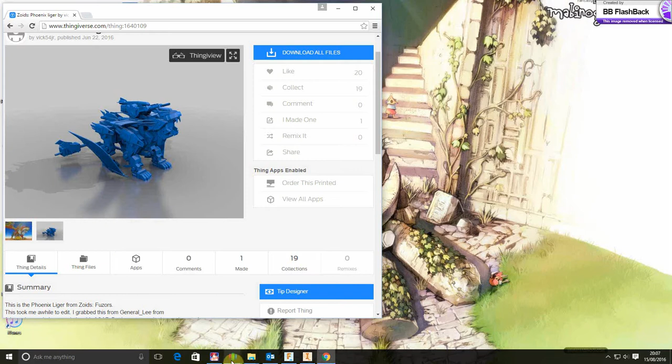It is this one, I believe. Let me just see, that looks about right. Let me just double check, make sure. Yeah, that's the one. So this is the file I downloaded, and found that this is how it comes. So I'm just going to close that, minimize it, and go open another one.

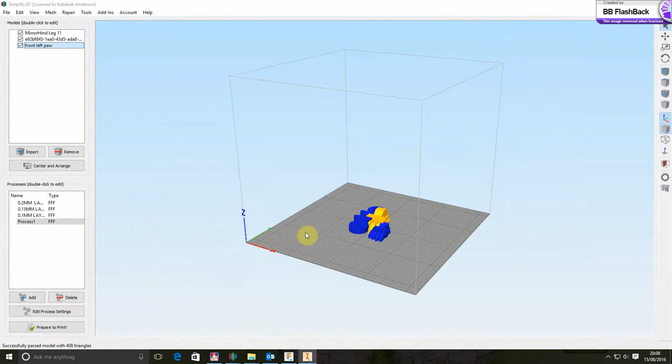I've got about 1, 2, 3, I think 4 versions open. So you can have quite a few open, and there's a reason why, and it will become apparent. Right, import, downloads. Is it? I think it's this one.

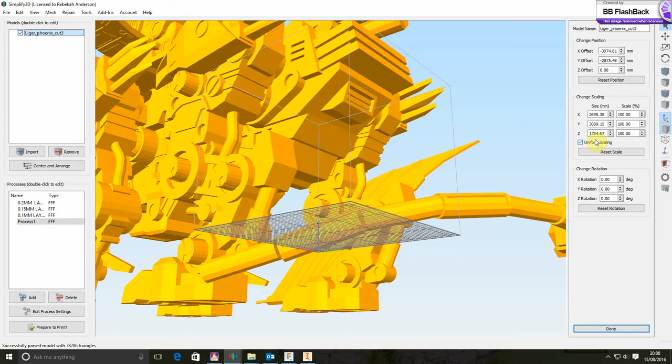Yes, I don't know how this guy designed it, but look at it, it is absolutely huge. 2 meters by 3 meters and 1.7 meters high. You know, sometimes you design stuff and it just gets away from you. So as you can see, it is that package. I'm just going to reduce it to 8%. Boom, Center and Arrange, there we go. And let's zoom in to that a bit.

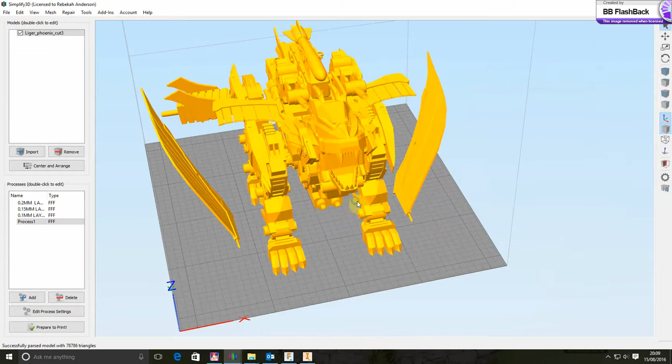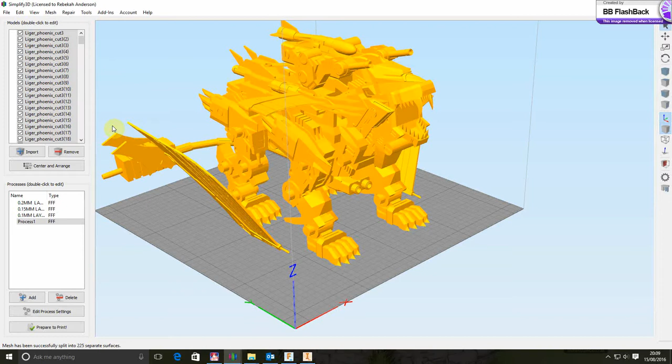Right, so it's one pack. I'll tell you what, if you print this in one go like this, you're a braver person than I am, because not a chance, there'll be just too much cleaning. So I realised that we got that Separate Connected Surfaces. I thought, how does it work? And I think quite a few who'd watch this video would ask the same question. Well, let's press that and wait, and wait, and you can see here it really cut it up big time. I think about 225 parts or something.

It doesn't take this apart, which is a good thing, and I'll explain later. However, if I do a Center and Arrange, you can see all the parts are laid out. So where someone has uploaded one piece, a complete model, you could actually take it apart. It doesn't work for everything, but it's worth a try.

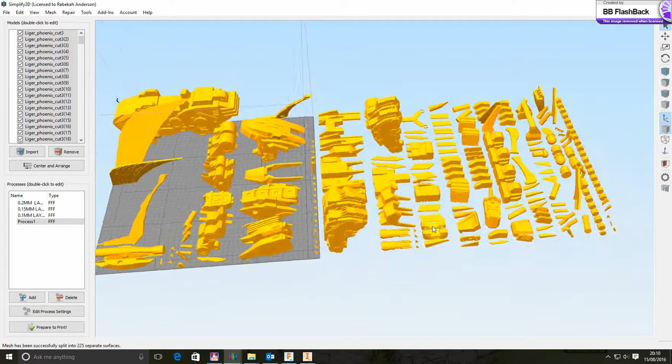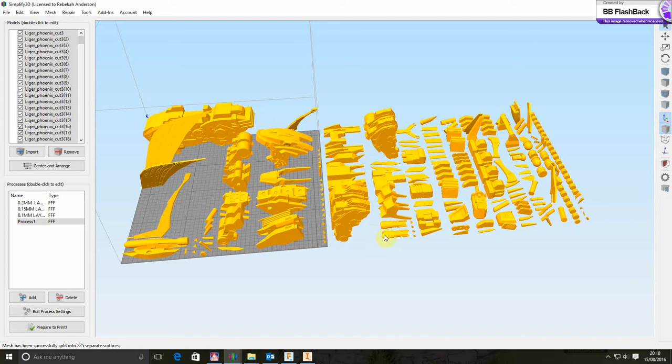Now what you've got to also realise is these things are the teeth, these are the shock absorbers, pistons, whatever for the legs. It really does take it apart, and there's stuff here you do not want to print separately. There's no point. You leave these little knobbly bits that go on. You know, it really does. So that's why I say don't rearrange after you've done that.

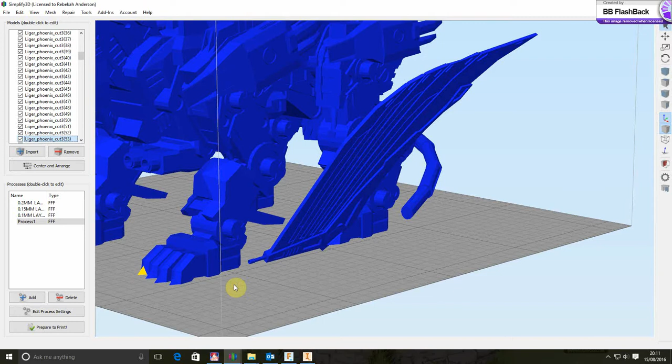Now let's find something that's a bit obvious. There we go. Right, is there any point in having that piece separately printed? No. So what I did was click on features that I think are part of the same printable item. So shift, press and hold shift, click, click, click, click. You can see how this guy's built it. It really is in separate bits, but there we go, one part.

One thing you'll notice in this instance, if I just get rid of that, you can see it's a block, right? So it's a part within a part. There's no cavity in this, it is really overlapping solids. Now there is a way around that, and I'll show you that later. That's why you see Fusion 360 open here, so you can really mess around with it.

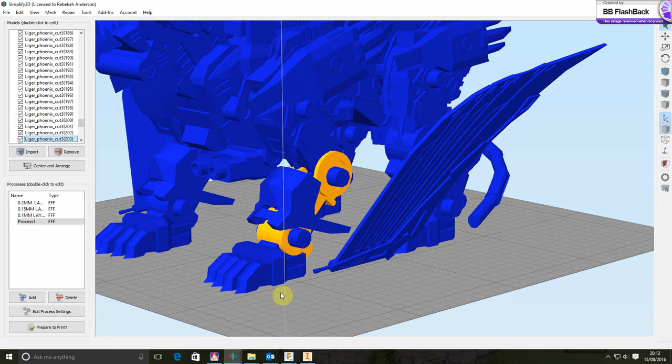However, in this instance, how to deal with this sort of thing, having multiple parts, well too many parts. So shift, hold, and click, click, click, click, click. Right, that's one part. If I go to File, Export Model, Export Binary STL, right, press that. I'm just going to save it in my downloads there, and I'm going to open another iteration. Let's hope it doesn't crash.

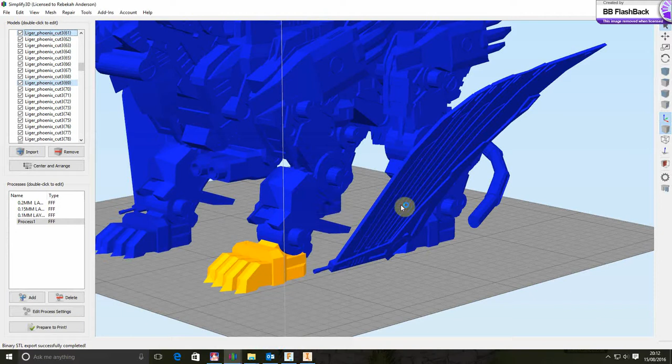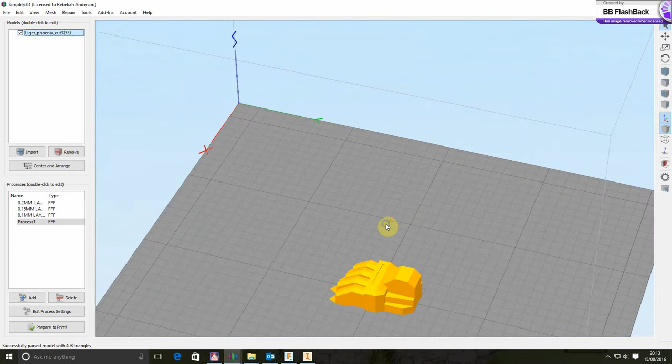Alright, there we go, remove all this guff. Right, import in my downloads. Where is it? Liger. Oop, make sure I've got that one, that one there, I think it is. Open. Boom, right, so only when you do the export, only the highlighted parts. So lo and behold, you have a single part. If you double click on it, it's 100%, so now it classes that as 100%.

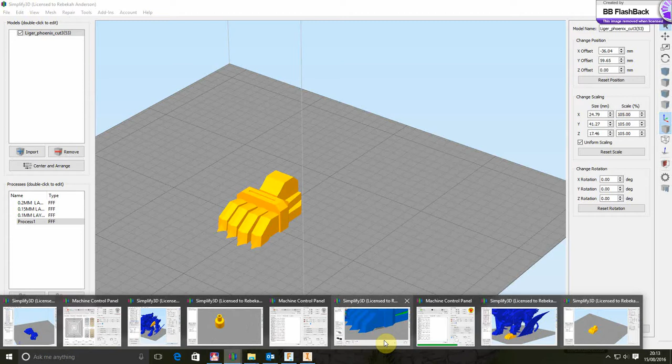So if you want it bigger, increase the size. If you want it smaller, decrease the size, whatever takes your fancy, and you can print that. Now, this is why I have more than one open, because I can then look at, say, that looks like a separate piece, but I might print it at the same time as this. So what I'm going to do is take that, take that, take that.

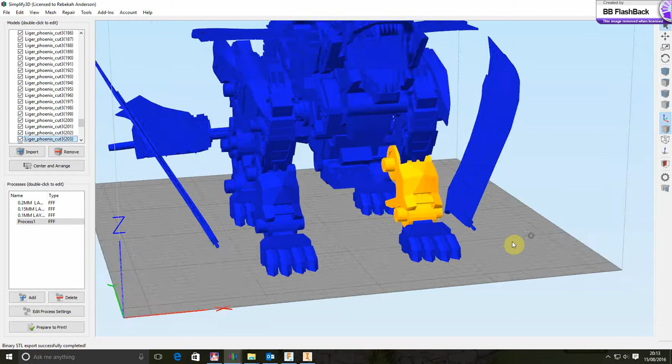I think there's another part in there. I'm also going to take that. There's some more bits and pieces that are blue there, another blue there, another blue there. Now you might think, holy crap.

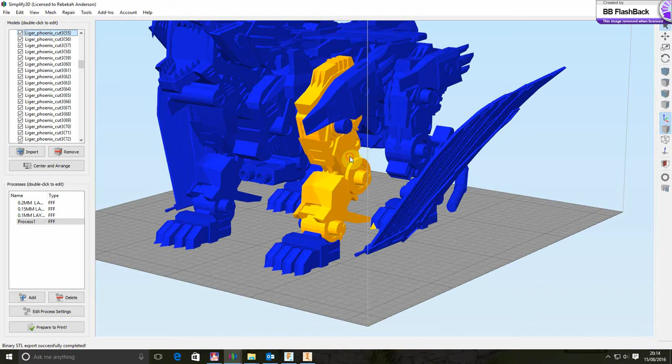Oh, what's going on? Doing so well. Right there, twist round, take that, and that. I think that's all I want. Yep, right, there's quite a bit here, and there's another little trick. It also helps with other prints as well.

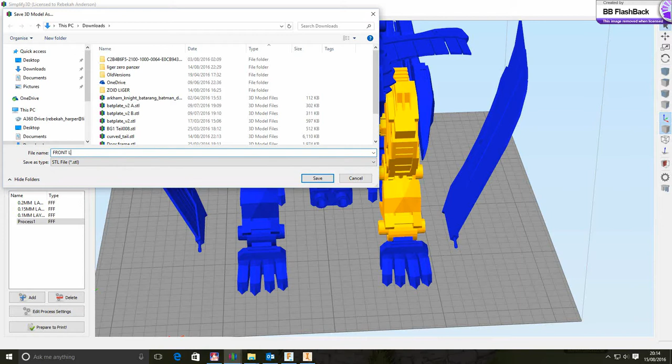Right, let's do an export models, export binary STL. Let's say front, left, leg, save. Right, let's go to this other one. Import, should be in downloads, yes. Front, left leg.

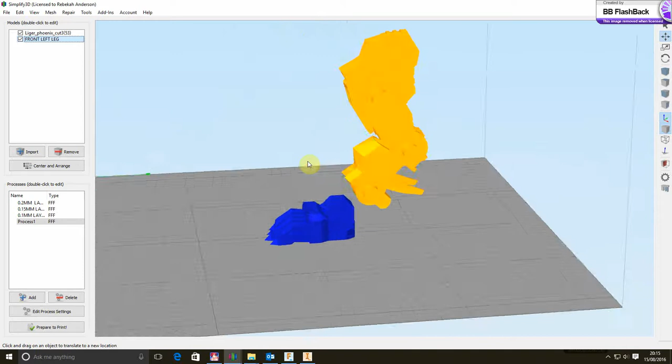There we go. Now, what you're going to have to appreciate is that there will be some after work, because you can see where you got this piece here and a block here. You may have to start shaving stuff out here so that that fits into there. I mean, that's specific for this model.

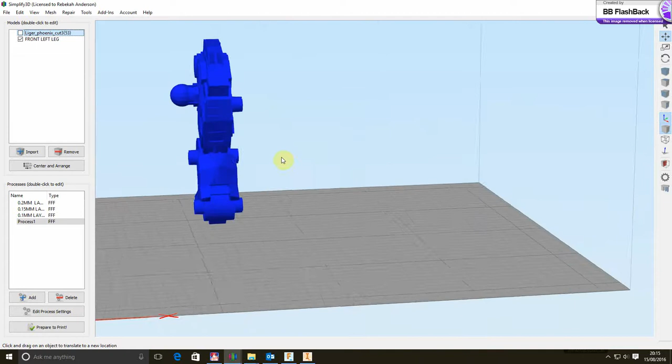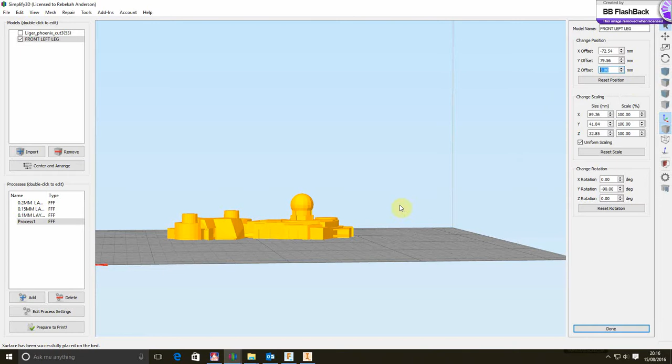However, as you may know, I'm not going to print it like that. I'm going to print it flat, so I'm going to make that one disappear, and I am going to use the base surface, the flattest surface, there we go, and I am going to drop that, double click, and what if I do that at 0? Right, I've just done that at 0, and I'm going to print half of it like this.

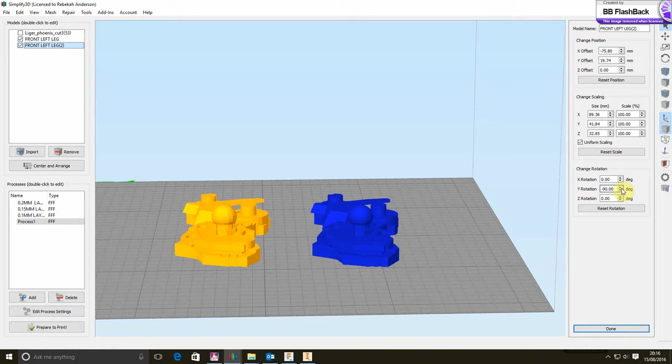It will only print what is visible above the plate, not what's underneath it. So I am going to copy, move that over there, and I am going to rotate it, let's zoom out a bit, on the x-axis. Chances are it's just going to completely disappear.

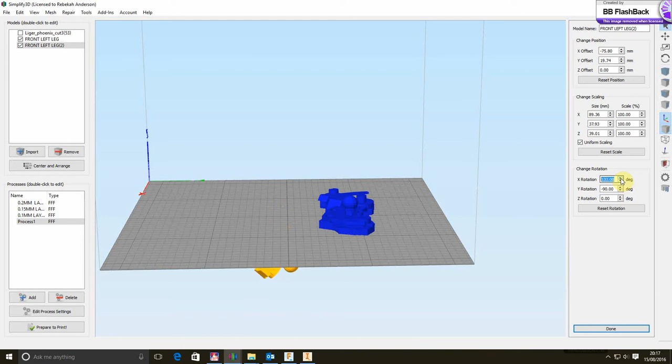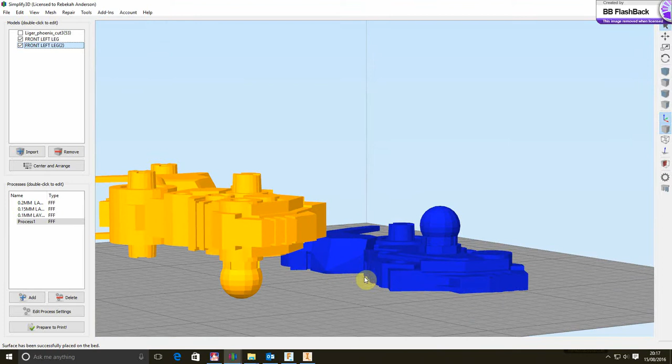Da-da-da-da-da. I could type it in, I suppose, 180 degrees. Da-da-da-da-da. Ooh, there we go. Right, and I'm going to do a place on surface onto bed, try and find the flattest one, and I'm going to try and find a feature that stands out as being unique, and I think that will be it.

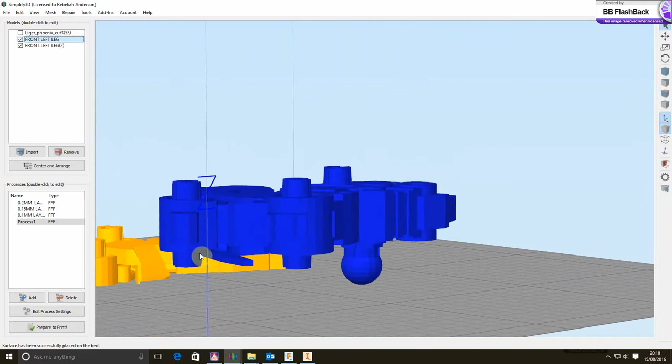Where's my point? There we go. So what I'm going to do, it would be better if you can actually calculate the height. On this one, if I got rid of this nodule and this, both sides will be basically exactly the same height, and therefore you can work out your halfway point. In this case, that won't be so easy, because that just puts it out of kilter. I suppose you could, but it's best to try and do it halfway.

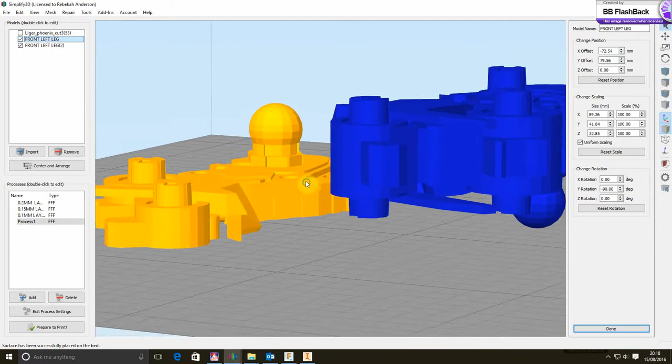In actual fact, I'm going to lower that one. I wish this was more like AutoCAD, where it zooms in on where you're pointing. Oh, there we go, if -1, see, you discover this as you go along. Right, and we lower this.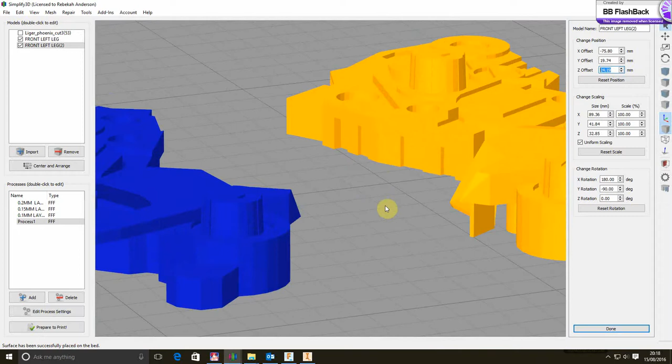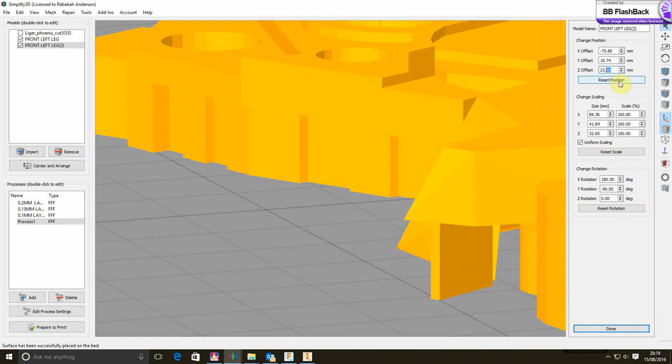Okay, so if I go down one more, it's too much. So if I take away the decimal value, obviously it goes down more, say 24, so that's too high. 23.5, ooh, okay, 23.6, 7, 8, oh that's too high, 7 may have been better, 7. I'm not doing this as an exact science, but roughly that's the two halves done, right?

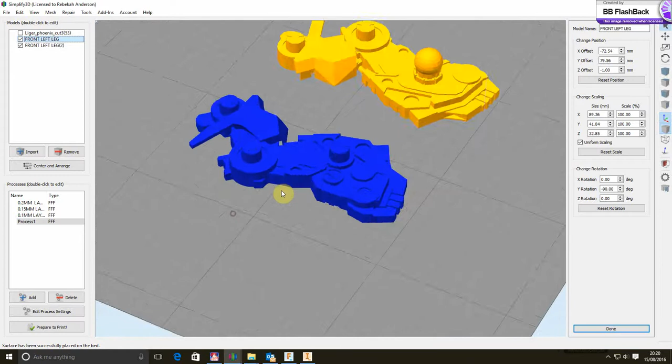Now the benefit of this is it prints a bit easier. Okay, we've got some overhangs here, there and whatnot, which you will have to have some support material, but have a quick look, see what I've got. Yeah, that's fine, doesn't matter really if it's 0.4, 0.25, obviously time wise, but you get the idea.

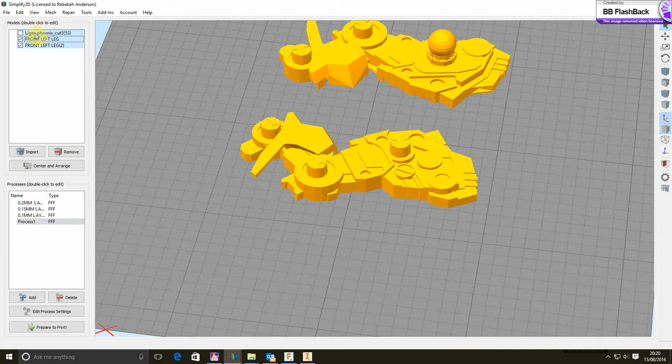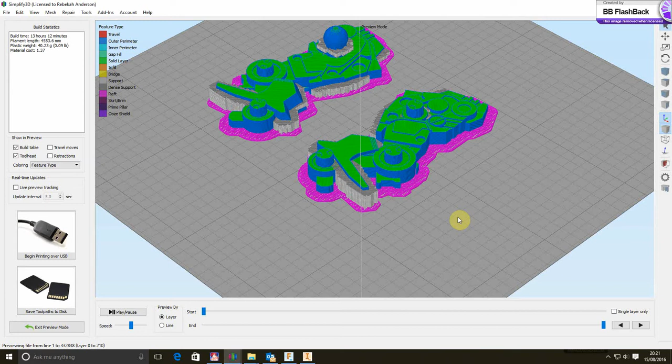Exit. If you've got more models here, like I've got the foot in there as well, easy way, select models, select that, there we go. And no foot. Sometimes if you've got multiple parts and you're happy with that, but you don't want to print them all at the same time, you can just have a whole list of parts in there and then select the models you want to print. And there we go, I mean I've got a raft going on there.

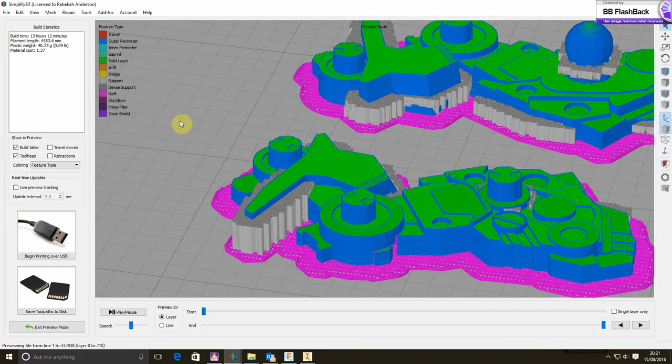So yeah, when I said about editing the STL, right, I've actually edited it. Fusion 360, if you're a hobbyist or whatever, if you go to register, you can register as a hobbyist or as a student, and you get, I think, about 2 or 3 years out of Fusion 360.

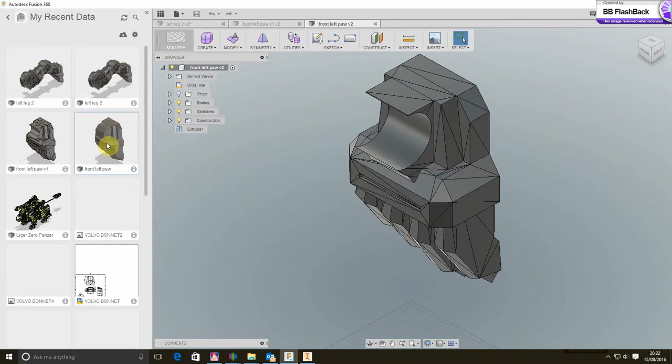It is worth it. If I just grab the something, grab something. No, I need something original. Give me 1 second. Right. Where is Liger? There we go. Right, open. Upload. This is very cloud based, so I don't like it cloud based, but then again it saves space on my hard drive as well. Wait for that to happen.

So this video was off the cuff. I was thinking about doing it, and then I went and did it.

Right, that foot that I edited has printed, I've got a little cavity in there. Here's my test part. Ooh, close. The same size? Slightly smaller. Right, okay, this is taking a bit of a long time.

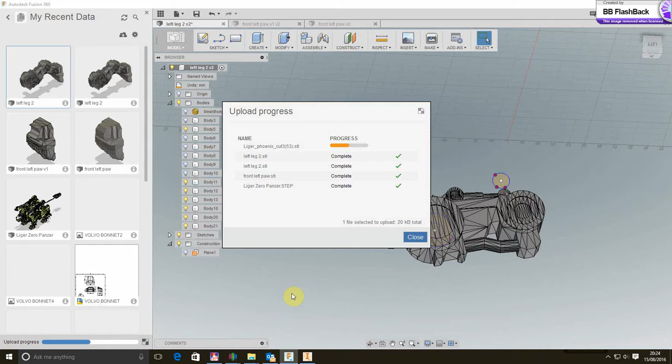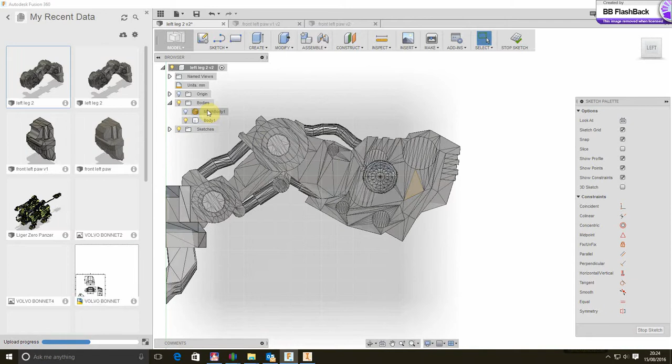Basically what I want to try and show you, and what I could do actually is do an undo on this file. Undo, there we go. Undo find features, there we go. Right. Oh yeah, you can. Right. I suppose that's as far as I can undo. Yeah, okay, undo create sketch. Can I delete that?

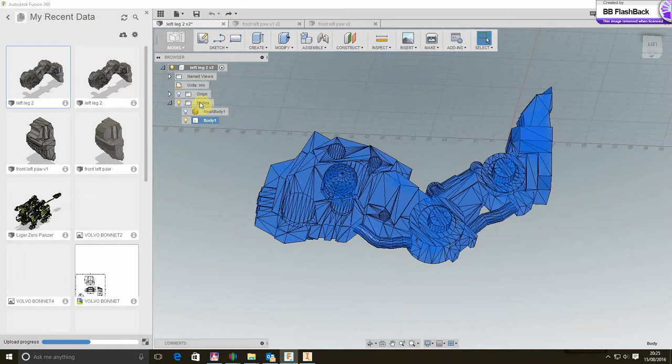Right, yeah, here we go.

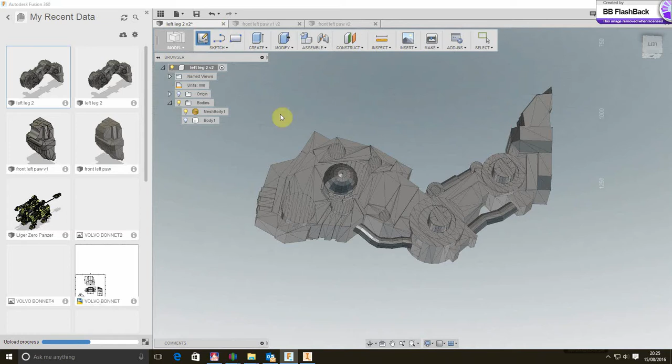When you get an STL and open it in Fusion 360, STLs have no volume to them. So when you want to do a sketch, you can't edit this. However...

If I right click and do a mesh to B-rep, you can see it has changed. The mesh body still exists, but that's the one I've already done before, so this is another B-rep conversion, and all of a sudden I can actually make changes.

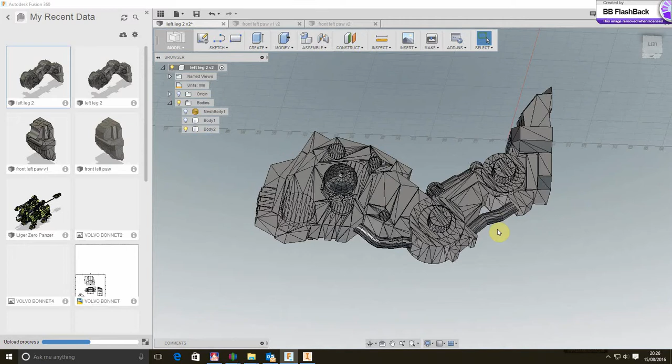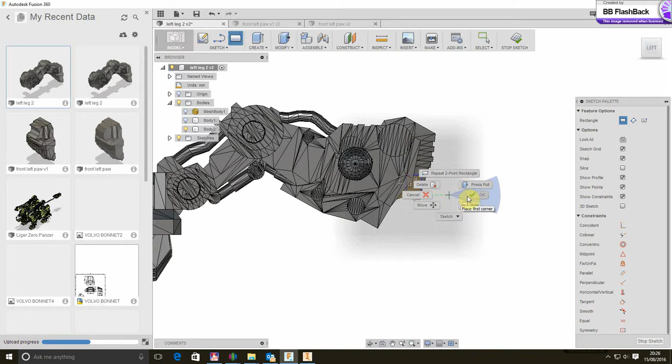Now, as per the moment, this is one piece, which I find annoying. However, once I've decided what I want to do, somewhere where it doesn't affect it, if you do a quick sketch, and then create an extrusion - don't do a modify, create an extrusion.

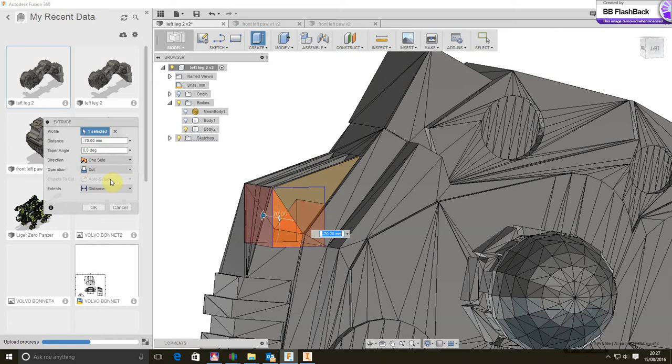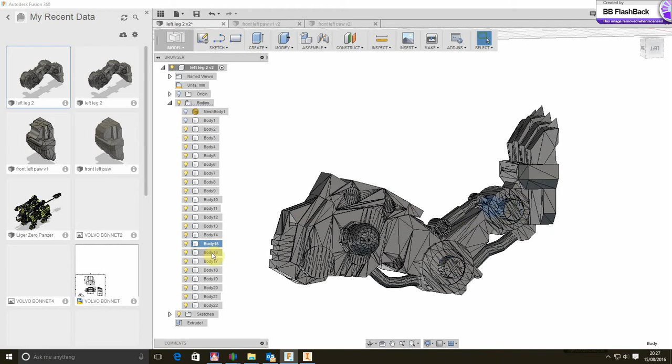Let's zoom in there. Right, it's a cut, whatever, you can cut it. Once you do that, for some reason it splits it all up, which is quite handy, because now all of a sudden you've got pieces. Same sort of idea as in Inventor, but you can see there's a little knobbly bit, and something on the other side, I think another knobbly bit.

What you can do from that is, if you do a modify and then a combine - let's do it that way. I would say hold down shift and select all the bodies you want. Okay, right, which one is it? I can't remember which one it is.

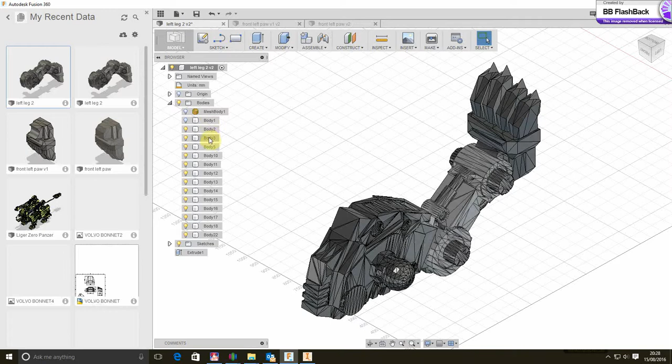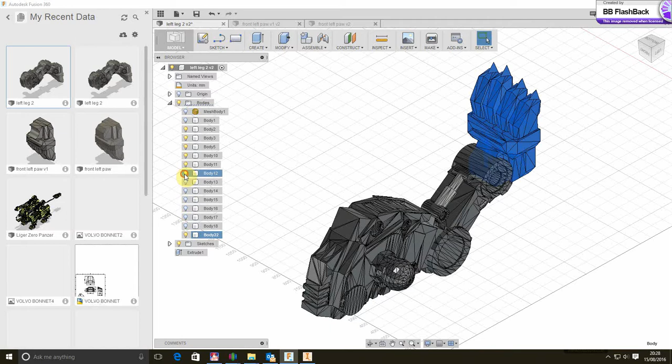There we go. Right, so body 22 is the entire foot now. Now you can start making changes. So if I turn all these off, there we go, so I've got my foot. Please be aware that it goes back to the original size regardless of what you've done in Simplify3D, which I don't really understand.

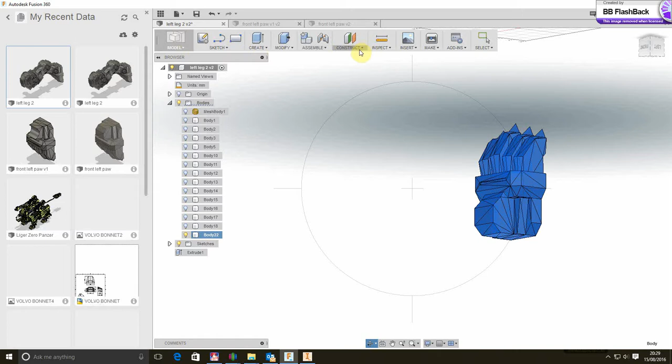Go to construct. If I do a mid-plane, click there, just take something that is actually parallel, and boom, we have a sketch surface. Create a sketch. Ooh, yeah, it flies all over the place. So if you're having drama seeing this, then I do apologise.

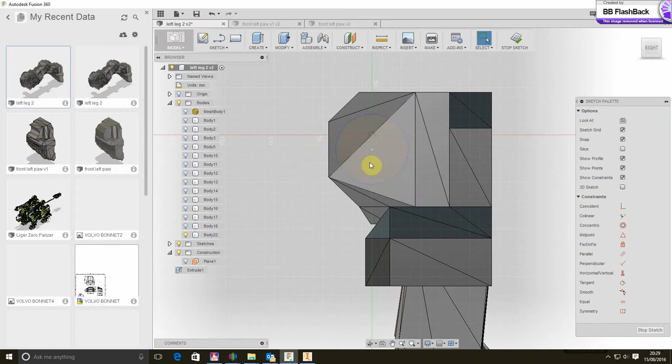I'm going to draw a circle. Remember, I said there was no real facility, like a gap of sorts, to insert a joint, but this way. So I've moved it slightly there. There we go, go OK. Do a create, extrude, take that. In this instance, because I've got it on the mid plane, I will do a symmetric extrusion by distance.

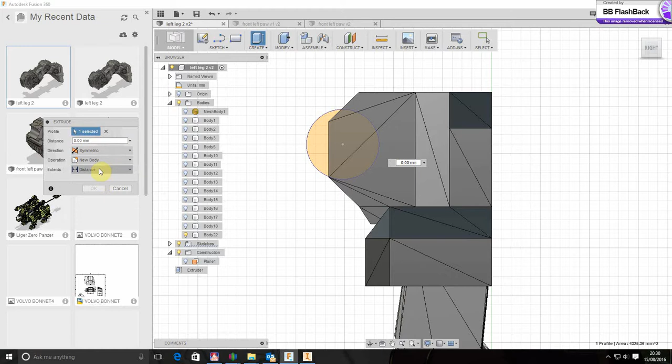We've got one selected, so... wow, okay, disappeared. And Bob's your uncle.

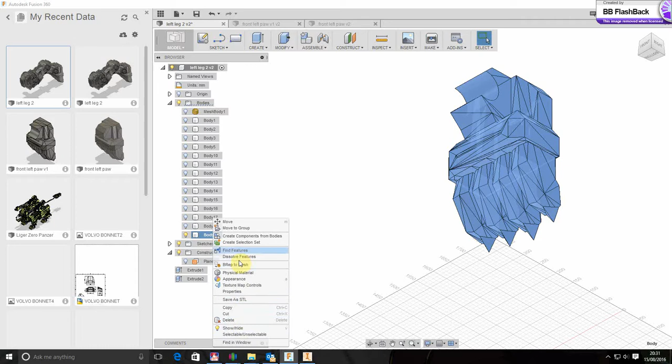What I can do here now is if I select that, if I do a right click - where's it gone, where's it gone? Save as STL, but here you've got output, send to 3D print utility, check. Print utility, you got Print Studio, which is an Autodesk one, Meshmixer, which is also Autodesk, Cura, which I don't like, and then Custom.

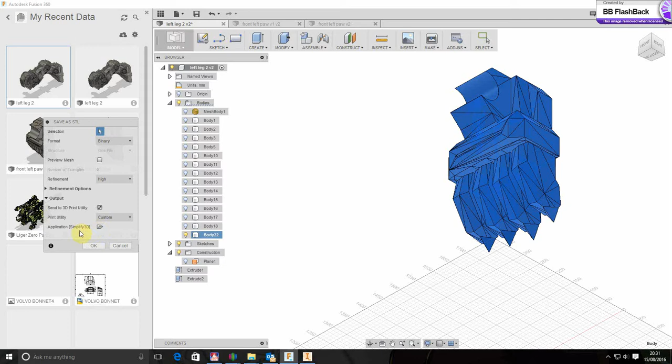And then with Custom, if you go to your exe file for Simplify3D, having pressed this folder, you can do this - Simplify exe. That's because I've got, I don't know why, it just seems to try and find my SD card reader.

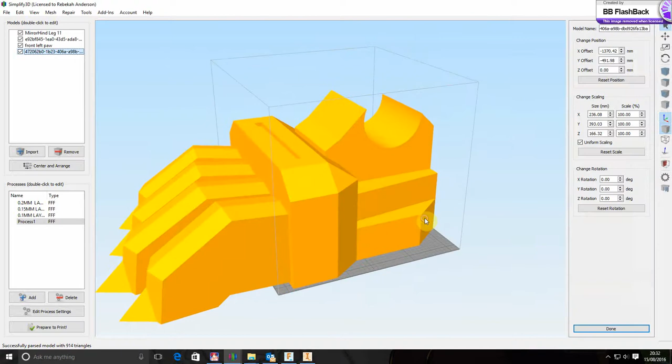Yeah, dimensions are too large. Boom! Smash. Alright, just crushed it. Shrink that down to, oh no, 8%. Could make it a bit bigger. There we go.

And you're ready to go. If you want to keep that, then do an export model to STL, and it will keep that original size as before. And you're laughing.

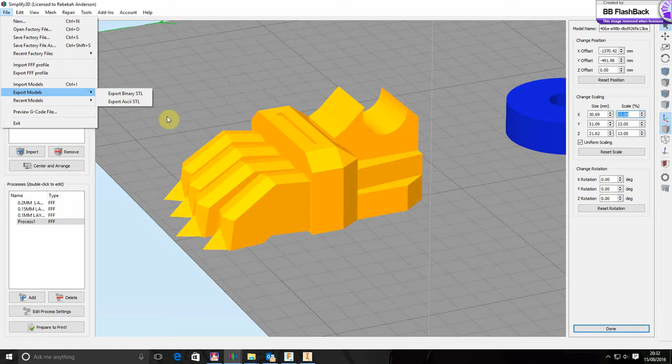So I hope that this has been interesting, and that it's enlightened some people to the use of Autodesk Fusion. It's a great tool for doing sculpting, modeling, and because you can actually model or make changes to STLs, you could use Meshmixer or other types of mesh manipulators, but here you can actually do all the normal design drawings like I did there.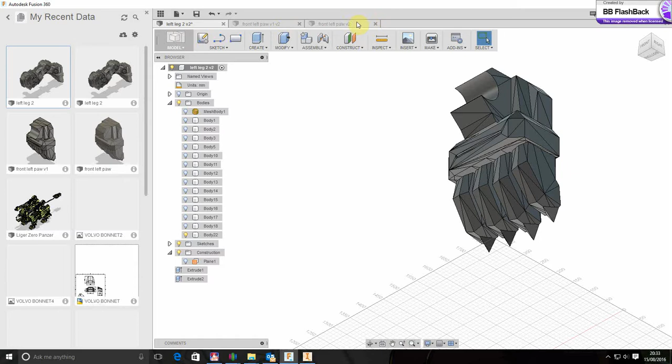So I do recommend you get this, and it feeds straight into Simplify3D as I showed you. You're laughing really, so I'm just going to get rid of all of this. There we go, saving and closing. This is a great tool, I do love it.

There we go, we're back to here. And then I'll keep going back to this and go like, okay, well, what part do I want next? I want that part, and you just put it all together. You know, you can build it up.

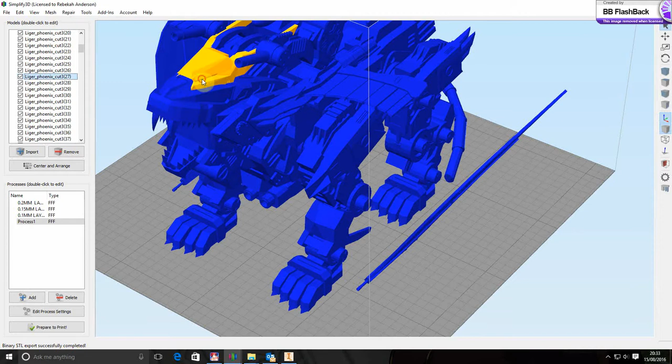Hope you found this insightful, and it works for you. So that is Separate Connected Surfaces. Doesn't work all the time, but it's worth a try to see if you can actually disassemble the model that you took from Thingiverse.

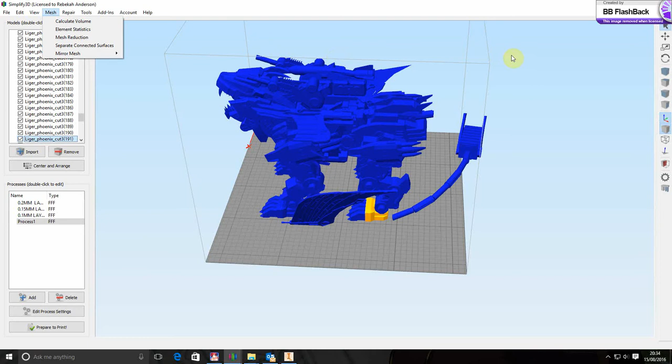Don't forget, Thingiverse - you don't sell their stuff, you don't print it off and then sell it. That is just not done, and I know it's being done. It's just wrong, so please don't do that. Thingiverse is a great source, and let's keep it in the spirit as it's meant to be. Well, that's me done. Catch you later.